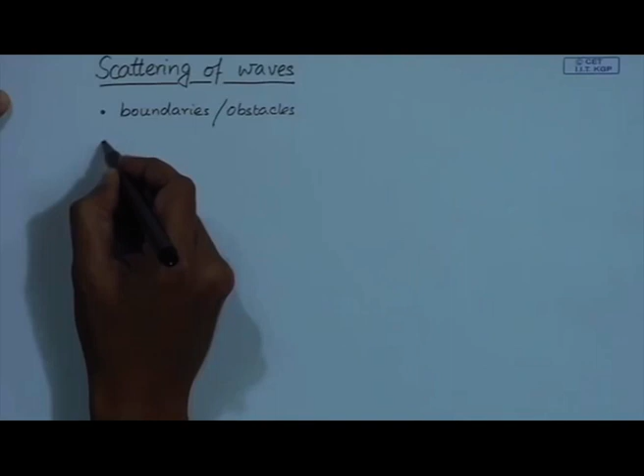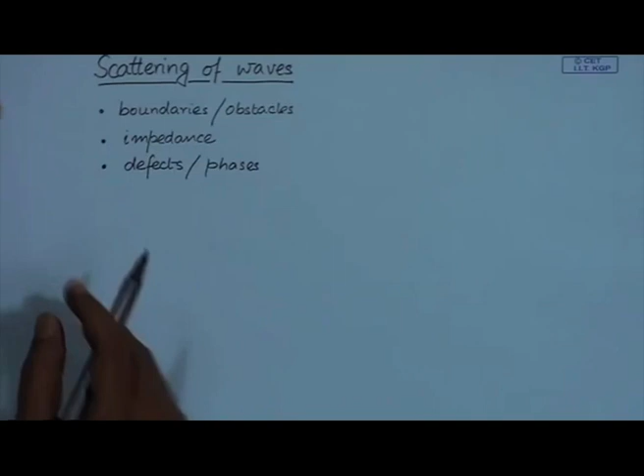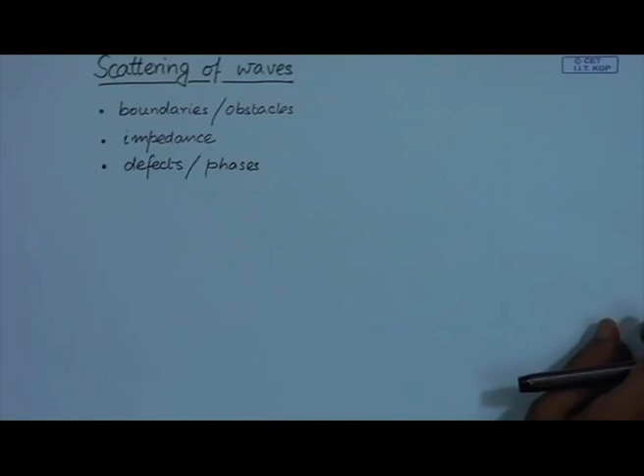So, today we are going to look at this phenomenon of scattering of waves, and this will help us understand what happens when a wave front goes and hits a boundary, an obstacle, or an impedance. Scattering can take place at boundaries or obstacles, at impedances such as finite boundary damping, or at defects. These defects or phases occur when there is a difference of phase inside a material. This scattering is of great practical importance for characterization and non-destructive evaluation of materials.

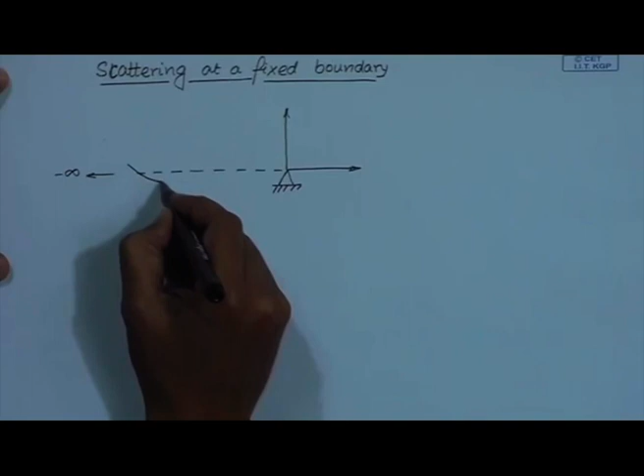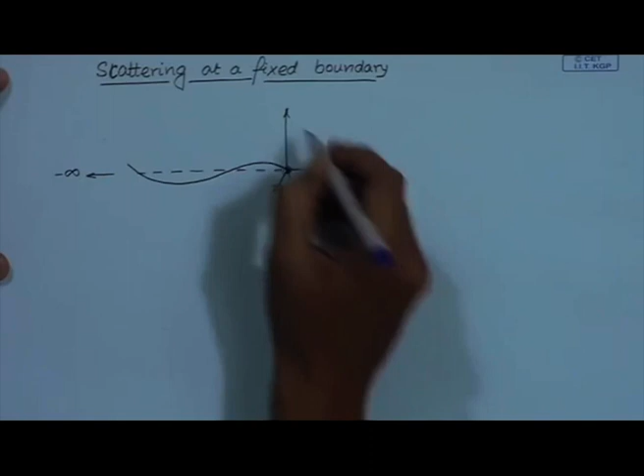So, let us start with scattering at a fixed boundary. We will study this problem with the help of the example of a string, a semi-infinite string. Here we have a string which is fixed at this boundary, and we consider that a harmonic wave is incident from minus infinity.

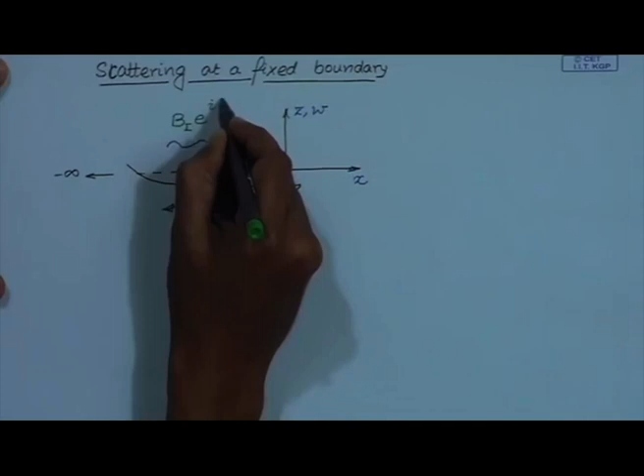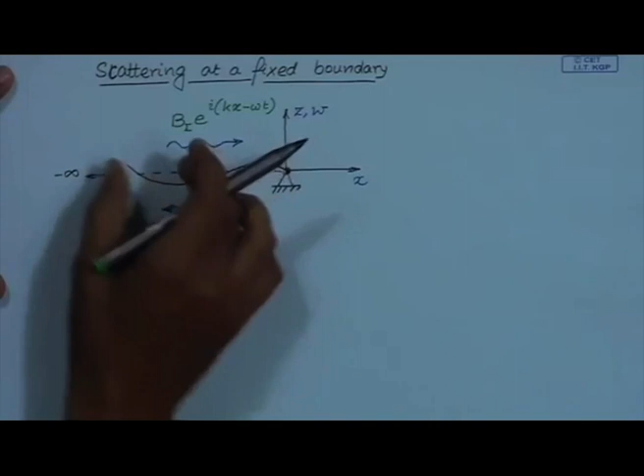A positive travelling harmonic wave is incident at this boundary, and when this wave comes and hits this boundary, there must be a reflection, because the material ends here. Now, we are going to consider an incident wave which is represented by this amplitude and space-time evolution, a positive travelling wave. Now, when this wave reflects, let us consider that the reflected wave is represented by...

Here I have used k and omega for the incident wave, the wave number and the circular frequency of the wave, whereas for the reflected wave I am using k prime and omega prime. Now, this medium is the same, so we must have, as we have seen in our previous lecture, that k must be equal to omega over c, and similarly k prime must be equal to omega prime over c. Since the medium is the same, the wave speed in this direction or that direction must be the same, so the wave speeds must be the same. So, k prime and omega prime are related by these relations.

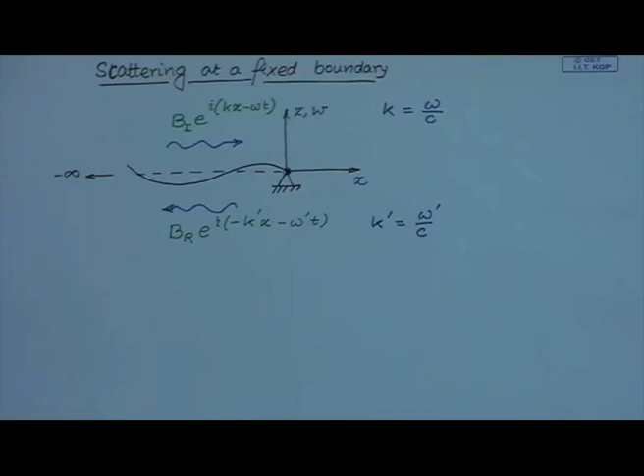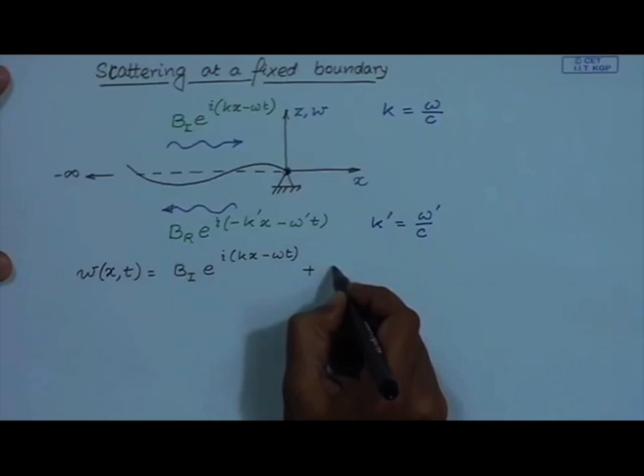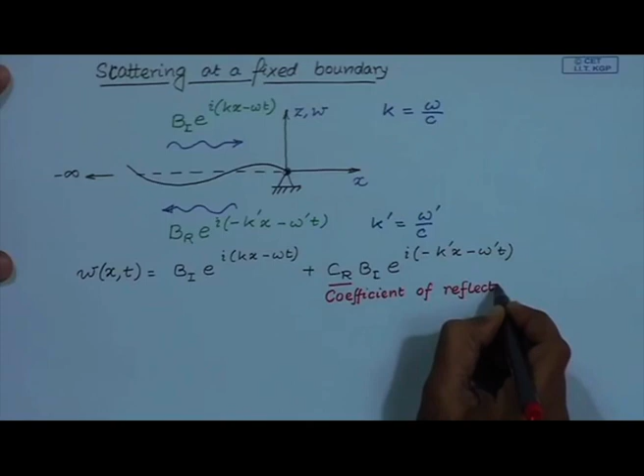So, the total wave field in this string is the incident wave plus the reflected wave. Now, what I am going to do is represent this amplitude of the reflected wave, which is B r, as a coefficient of reflection times B i, and there is this exponential part. So, here I am introducing the coefficient of reflection.

Now, the boundary condition at this fixed end is, of course, that this must be 0. So, when I substitute this total wave field in this boundary condition, this gives me...

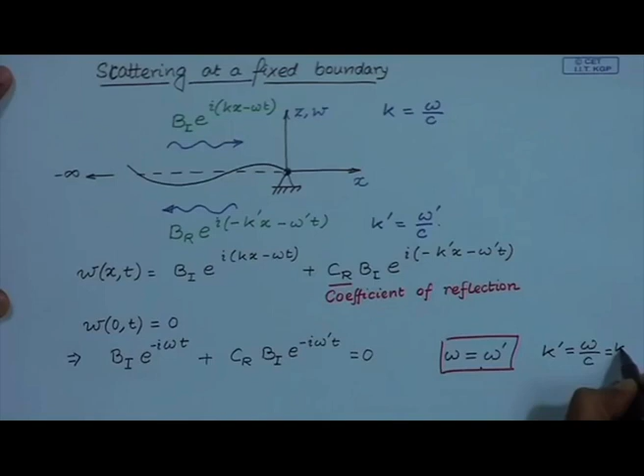Now, this relation has to be satisfied for all time t, and that is possible if and only if this condition is required, which means that the frequency of the incident wave must be equal to the frequency of the reflected wave. Now, immediately using this, we find that therefore k prime must be omega by c, and that is equal to k. So, which means that the wave number of the reflected wave must be the same as the wave number of the incident wave, since the frequencies of these two waves must be the same.

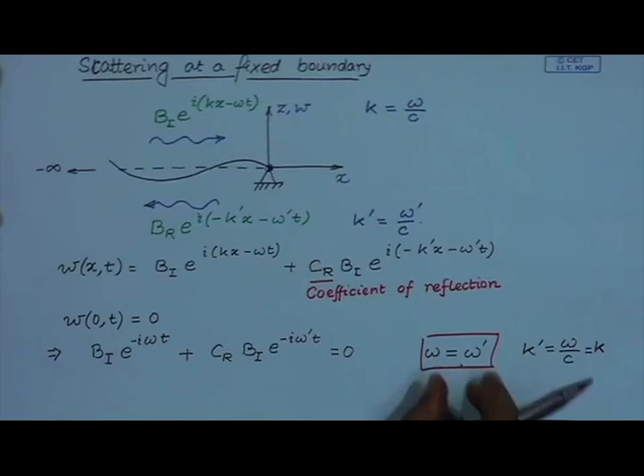So, once we put this condition here, what we have is that this implies C r is -1, because the other part is not equal to 0.

Now, this can also be written as... So, minus 1, the reflection coefficient minus 1 can also be represented as an exponential i pi, which tells us that there is a phase inversion. So, it is the phase change of pi. So, the reflected wave suffers a phase change of pi. So, the CR equal to minus 1 implies that the wave undergoes a phase change of pi.

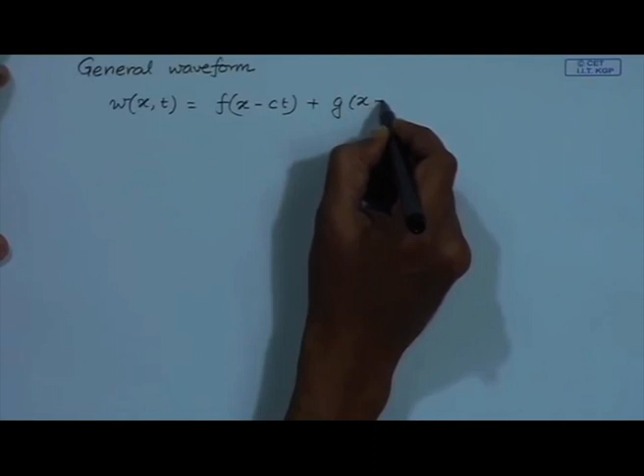Now, if you consider a general waveform for the same reflection process from a fixed boundary, then we have the field, the wave field represented like this, as we have done before. Now, the boundary condition again is, and that implies so this is plus, so this must be 0. So, what we therefore have is g of z, let me write C t as z, is equal to minus of f of minus of z. So, which means that our solution, the total wave field becomes

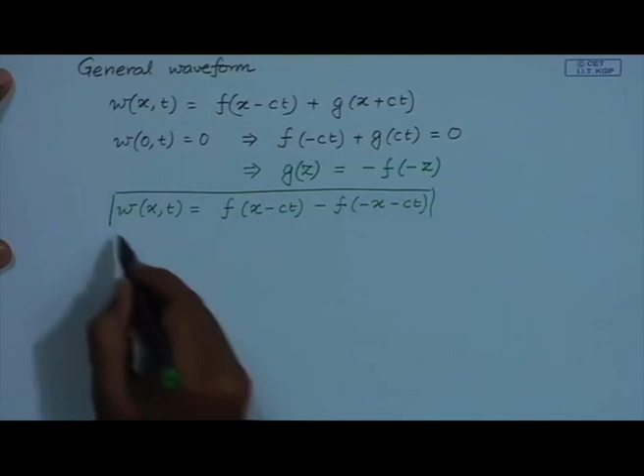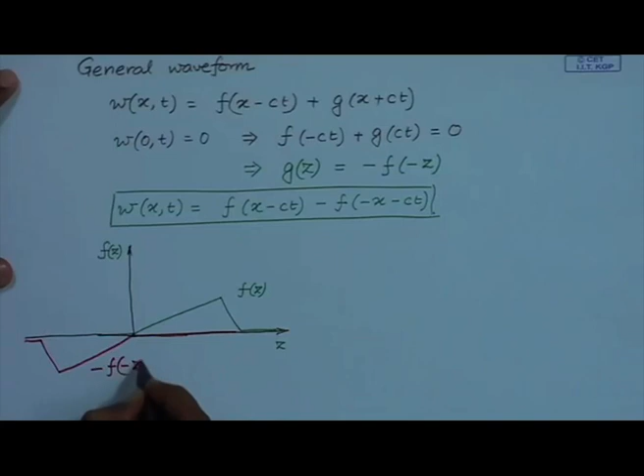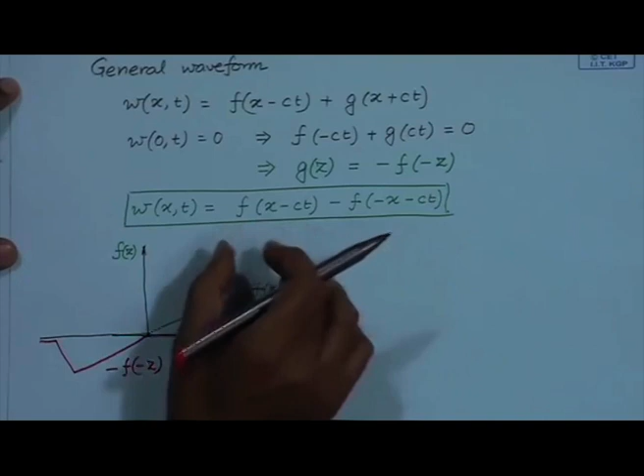Now let us see what is this minus of f of minus z. So, suppose this is f of z, then minus of f minus z would be... so if this is f of z, then this is minus of f of minus z. So, the total wave field is superposition of these two travelling waves, now one in the positive direction and the other in the negative direction.

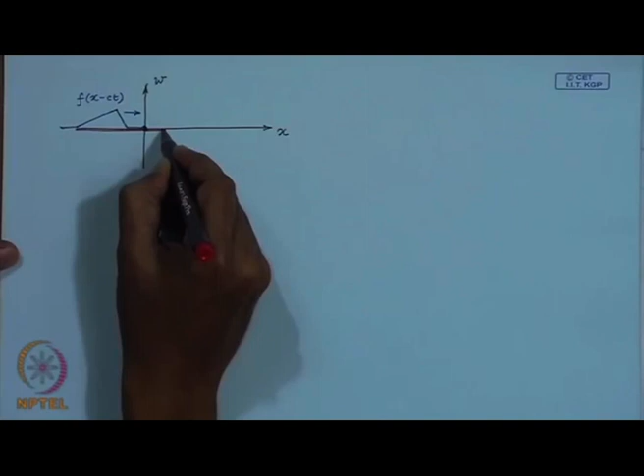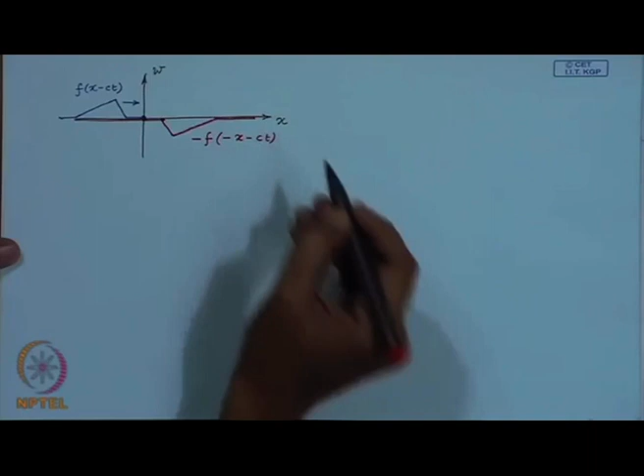So, let us see this. So, consider that there is this incident wave at this boundary, so this is f of x minus c t. So, this is moving towards the boundary, and imagine that there is a wave which is minus of f of minus x minus c t. So, this is travelling in this direction with the same wave speed c. So, superposition of these two is going to give us the net wave field in the string.

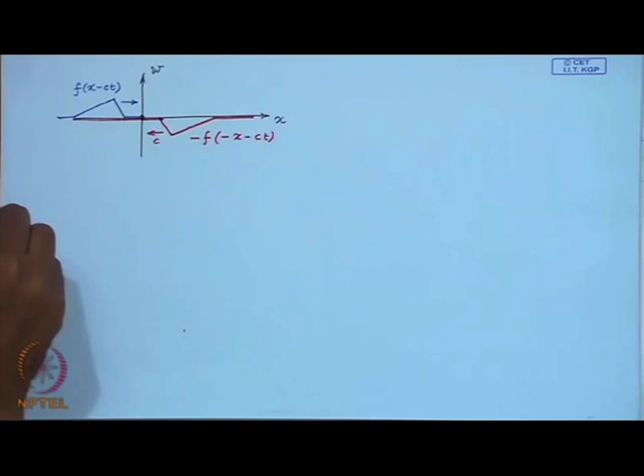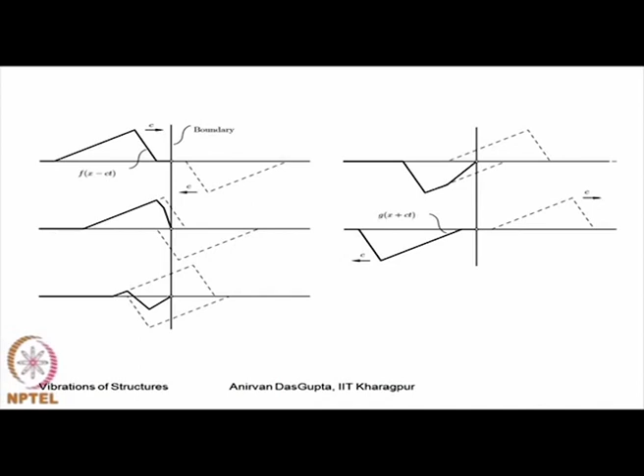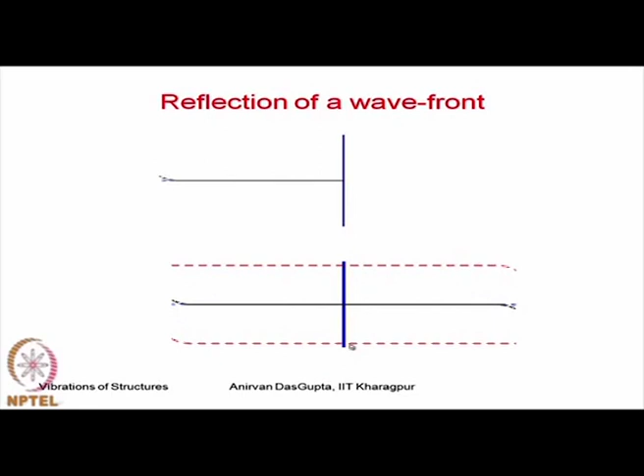So, in this next animation here, what we observe is there is a wave front which is appearing and the front is travelling towards the positive x direction and it hits the boundary and gets reflected. Now, this reflection process is shown in the figure below. So, here we find that there is a front propagating which is this red dashed curve and there is a negative propagating inverted wave which is because of the reflection as we have discussed just now. So, the superposition of these two waves is creating the reflected wave. So, the front comes, hits the boundary and is reflected back.

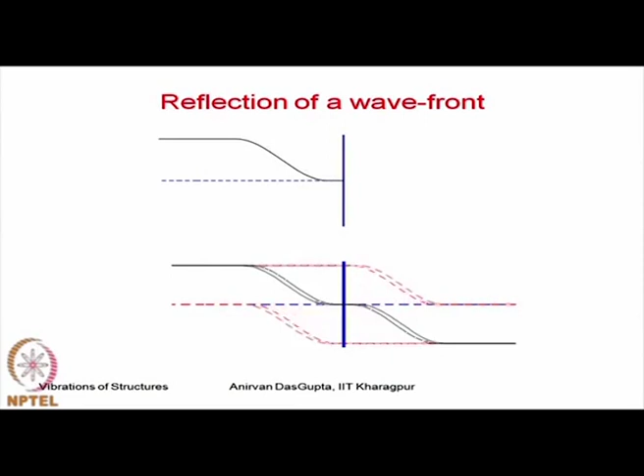So, what we observe is that as the wave comes it hits and then the reflected wave is a superposition of these two waves that we have just discussed. Now, one is the incident wave, the other one was the reflected wave. The reflected wave is inverted as well as there is a mirror image created. So, we have minus of f of minus x. So, f of minus x is the mirror and minus f gives us the inversion. So, there is an inversion as well as a reflection. So, that is what we have observed.

Now, let us look at this case of a fixed string. Now, when you have a pulse which is travelling to the left, let us say, then it hits this fixed boundary and you have a wave, that is the reflected wave is like this. This reflected wave goes, this positive travelling wave now goes and hits the right boundary, and there is a negative travelling reflected wave. So, that then completes the full cycle. So, the time taken here, I have written out the time taken by this wave to travel this whole path.

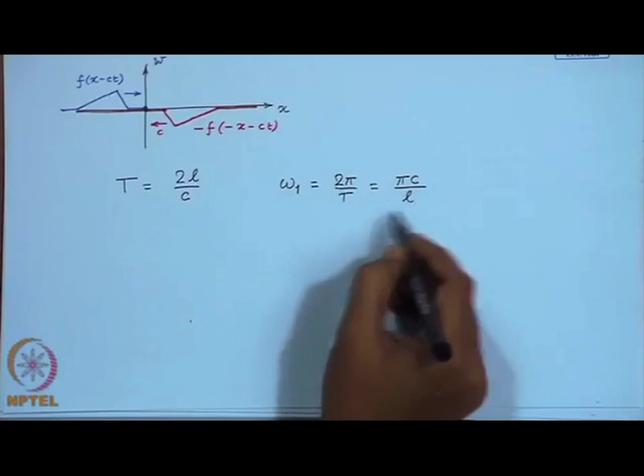So, we find that the time period is 2L over C. It takes this much time for the pulse to once again repeat itself. From here we can estimate the fundamental frequency, the circular frequency, which is 2 pi over T, which is pi C over L.

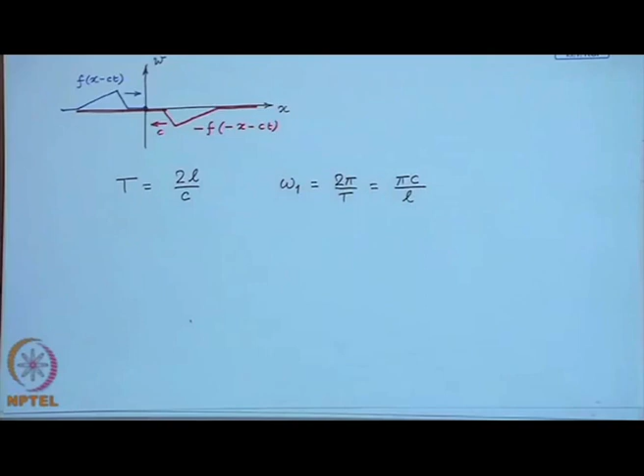And this is the fundamental circular frequency of a fixed-fixed string. So, the frequency of a finite system can be estimated or calculated based on this wave reflection process that we have just studied. So for the fixed-fixed string we have been able to calculate the fundamental frequency.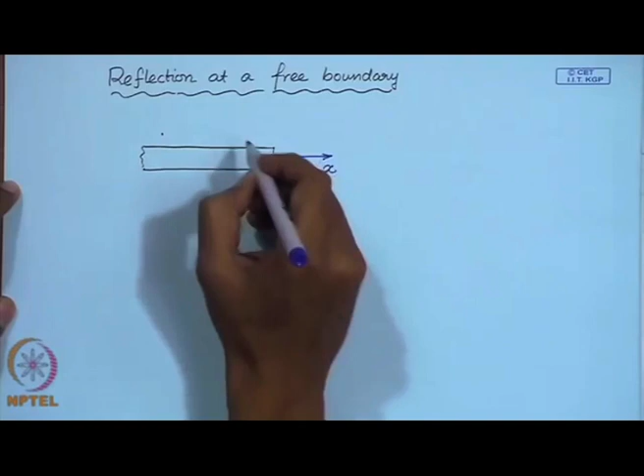Now let us look at this example of reflection at a free boundary. So for this we will consider the uniform bar. At any point x of the bar we have this axial displacement. So this is the field variable u of x and t.

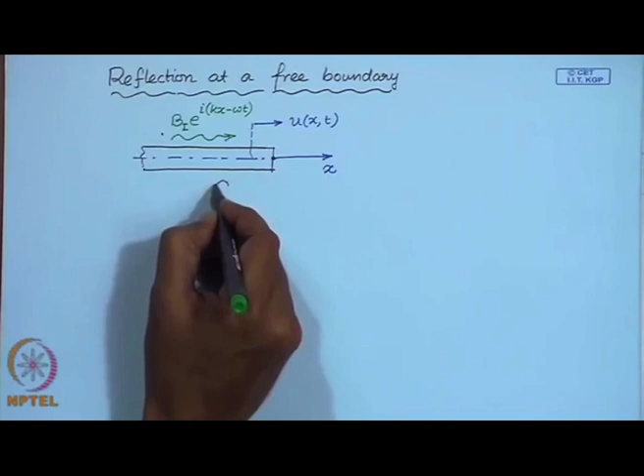So again we have this incident wave, and since this is a free end now, there is an incident wave given by this, and since the material ends here, there must be a reflection. So this we are going to once again represent as reflection coefficient times B I times a negative travelling harmonic wave.

And what we learned from the previous example, these k and omega must be the same as we have seen in the previous example. So the total wave field in the bar is given by this expression.

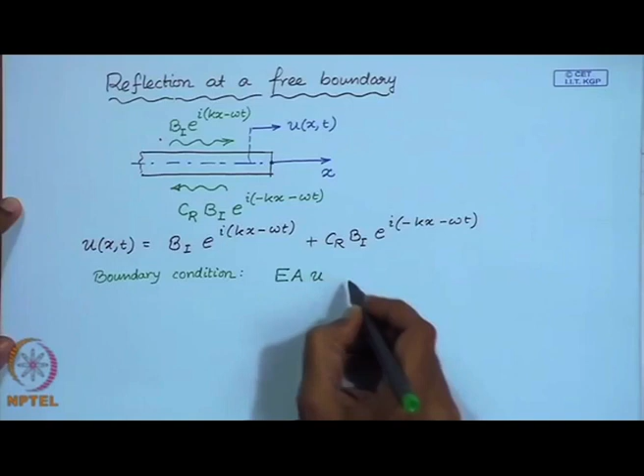Now the boundary condition. So this is a free boundary. For a free boundary we know that it is a force-free, or natural, boundary condition. So once you substitute this wave field in the boundary condition.

And since this time function will not be zero, this has to be satisfied for all time. So this would imply, upon simplification, that CR, the reflection coefficient this time, is 1. And 1 is nothing but exponential, you can write it like this.

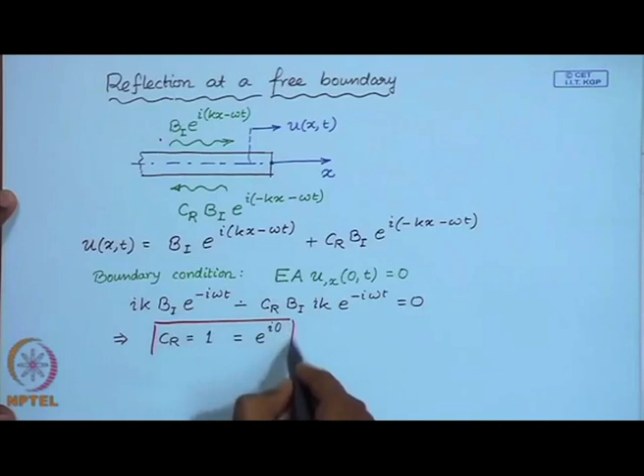So this tells us the reflected wave suffers no phase change. So it is reflected as it is.

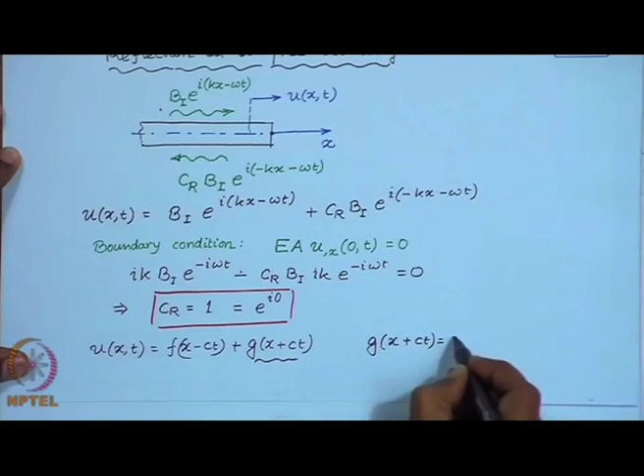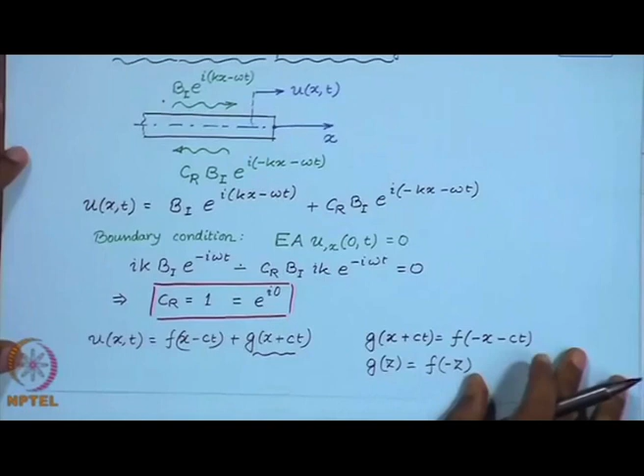Now you can perform the same analysis as in the previous example for a general waveform. If you consider and use this boundary condition, then you will find that the reflected wave can be represented such that g of z is actually f of minus z. Now recall that for a fixed boundary, g of z was minus f of minus z, and as we have seen, f of minus z is just the mirror reflection of f of z.

So there is no inversion of the wave, as we have seen, there is no phase change. Now here in this animation,

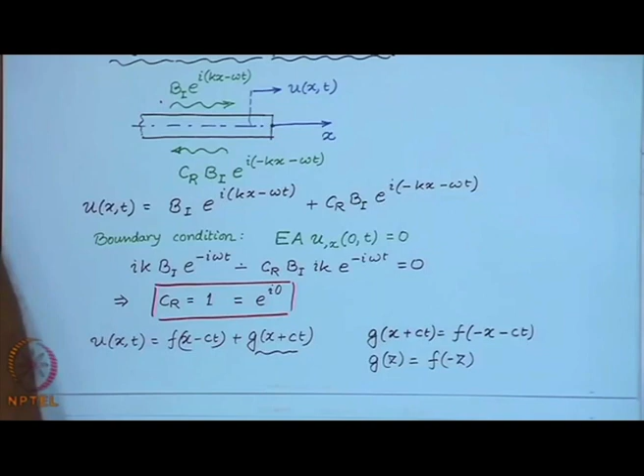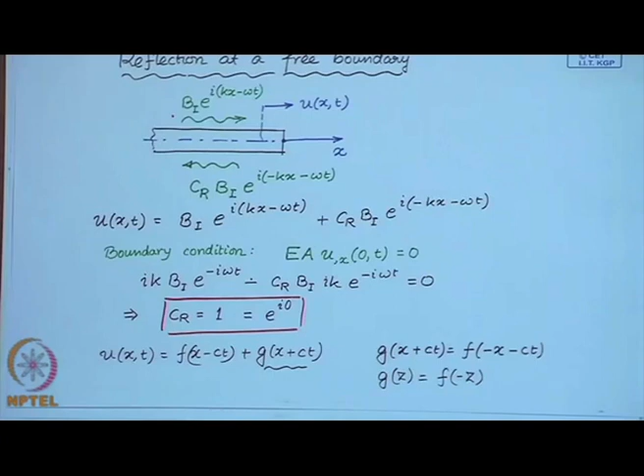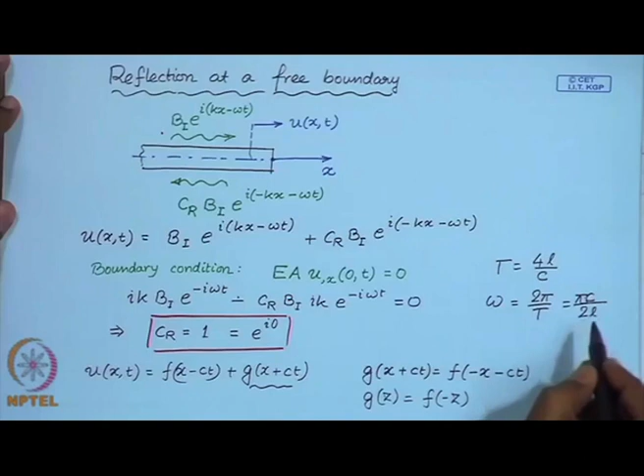Now if you calculate the total time it takes, given here, in this case you have a time period of 4L over C. Which means that the circular frequency is 2 pi over the time period, which gives us pi C over 2L.

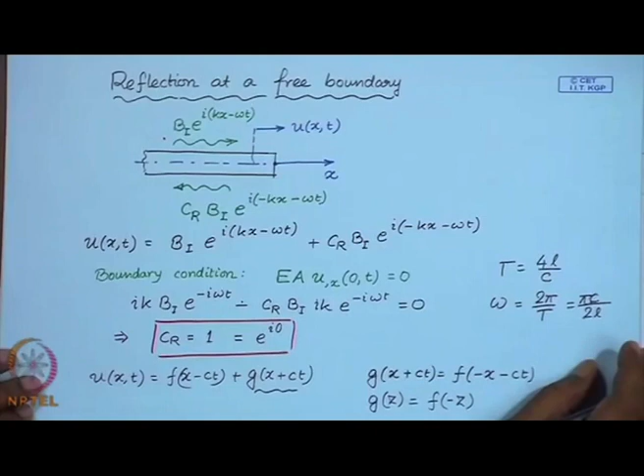So, we have looked at these two examples of scattering at a fixed boundary and scattering at a free boundary. Now we are going to generalize this, and look at scattering at a boundary with finite impedance.

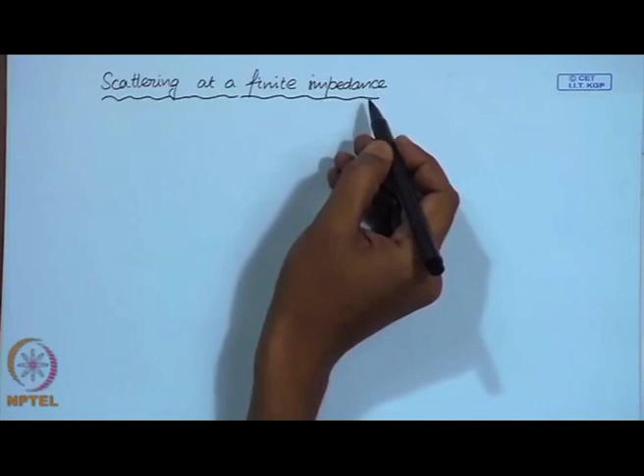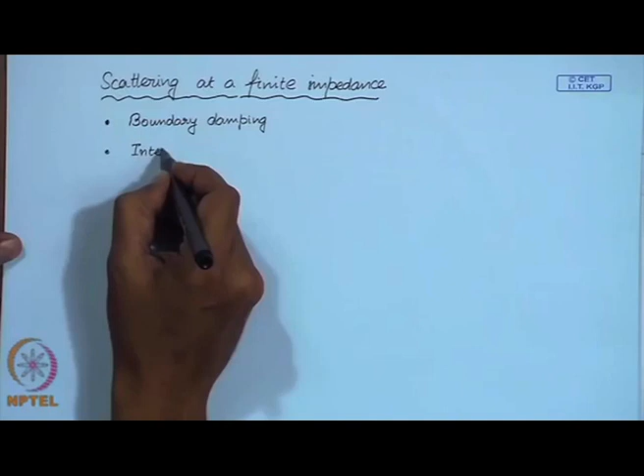This case arises when you have, let us say, boundary damping, or you have internal phases in a material, or even defects. Then you can have scattering at a finite impedance.

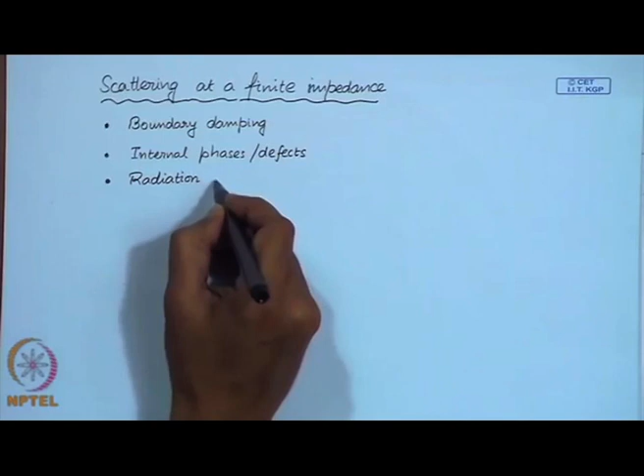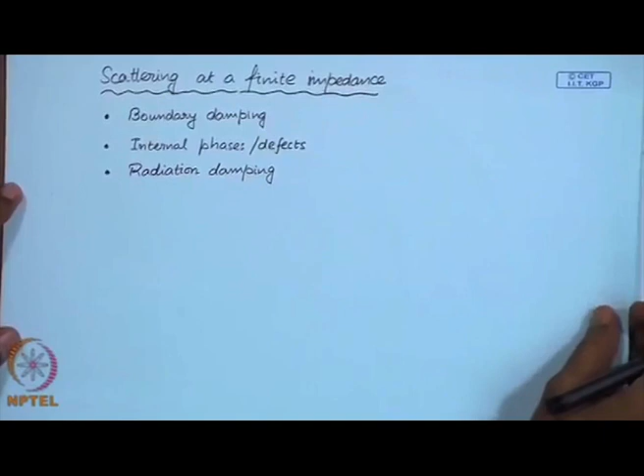The third case occurs when you have radiation damping. So these are the situations where you can have scattering at a finite impedance. We are going to look at these situations with the example of a uniform bar which is made up of two materials.

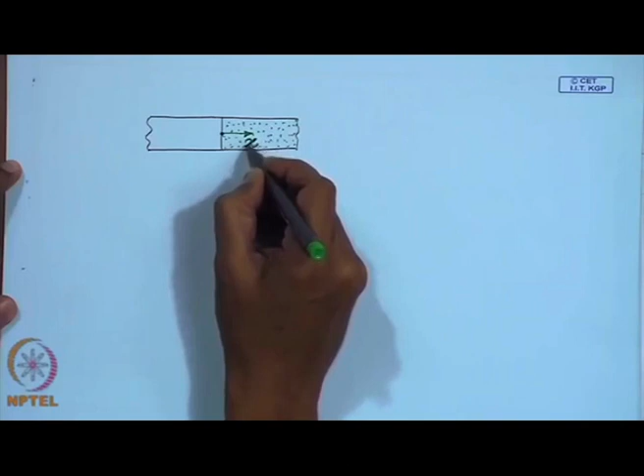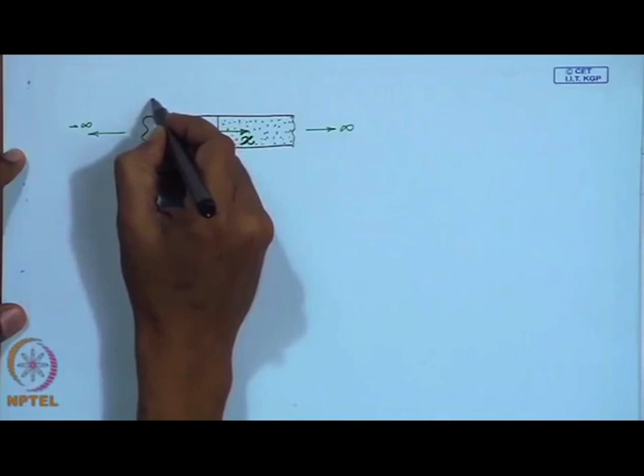So we have this junction. This material 1 has material and geometric properties like this, and material 2 is like this.

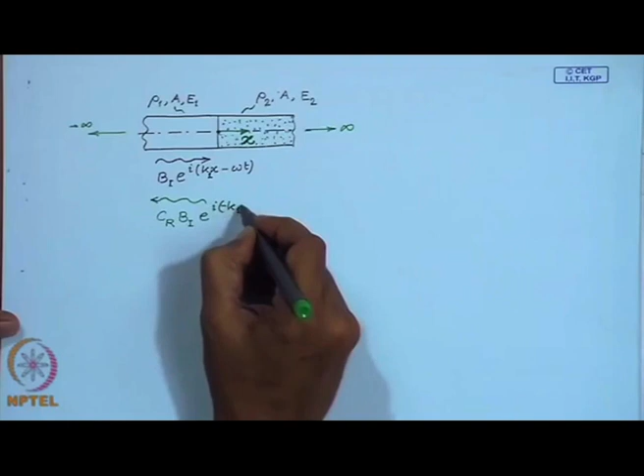Now we consider that there is an incident wave from the left, a right propagating harmonic wave. Here I am introducing a wave number k1 in material 1, and then there is a reflected wave which will have the same wave number k1, only it is a negative travelling wave.

There is a transmitted wave that propagates in material 2, with wave number k2. Observe that I have taken the same frequency, as we know from our previous calculations that these frequencies must be the same. This comes from material continuity, so the frequency must be the same, but the wave numbers may be different.

In these two different materials, the wave number, the frequency and the wave speed are related like this. So C1 is the speed of axial waves in material 1, given by this expression, and similarly for material 2 we have this relation.

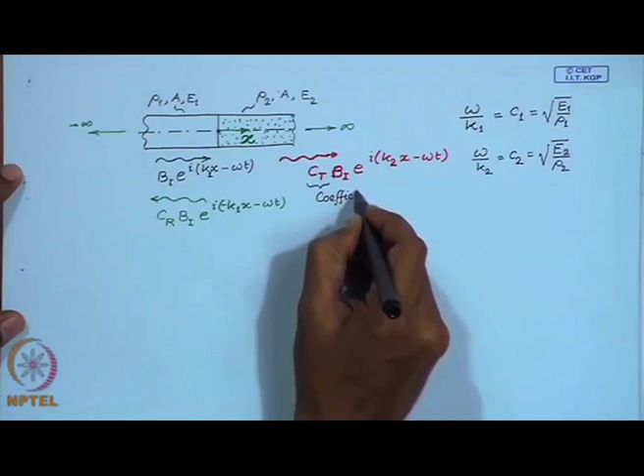Here we have this as the coefficient of transmission, Ct, and Cr as the coefficient of reflection. So the total wave field in material 1 is given by this expression.

Similarly, the total wave field in material 2 is nothing but this transmitted wave.

Now at this junction we must have some junction conditions. The first condition comes from the continuity of the material, the junction should not break, so material continuity has to be maintained. There are two junction conditions: the first is material continuity, or continuity of displacement.

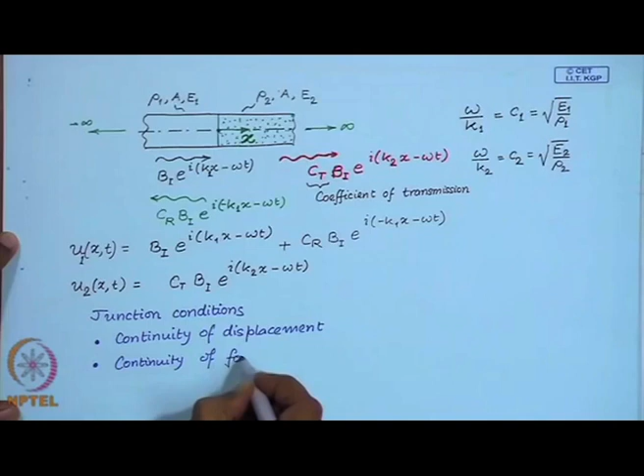So let us write down these junction conditions. The displacement junction condition tells us that the displacement of material 1 must be equal to the displacement of material 2, and the force continuity can be written as the force on material 1 must be equal to the force on material 2.

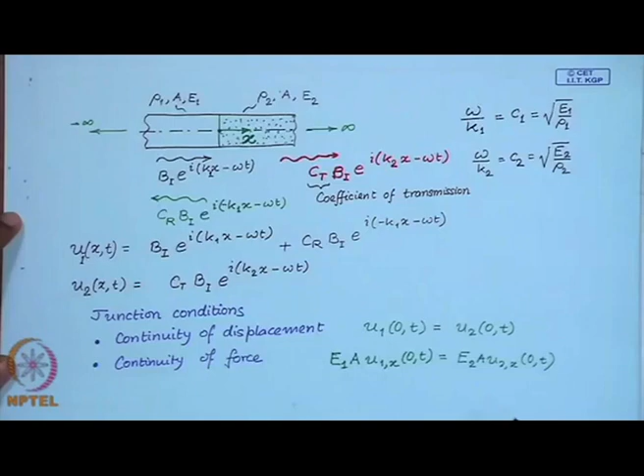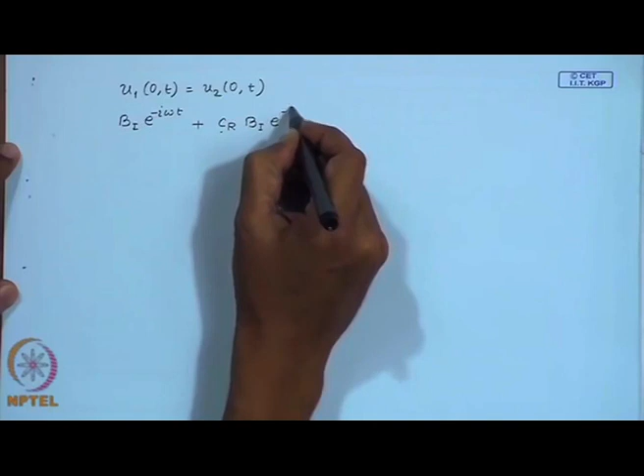Now when we substitute our wave field into these two junction conditions, let us first look at the displacement condition. If you substitute u1 and u2, and since all these frequencies have to be the same as we have already assumed, this implies the condition that we get from continuity of displacement.

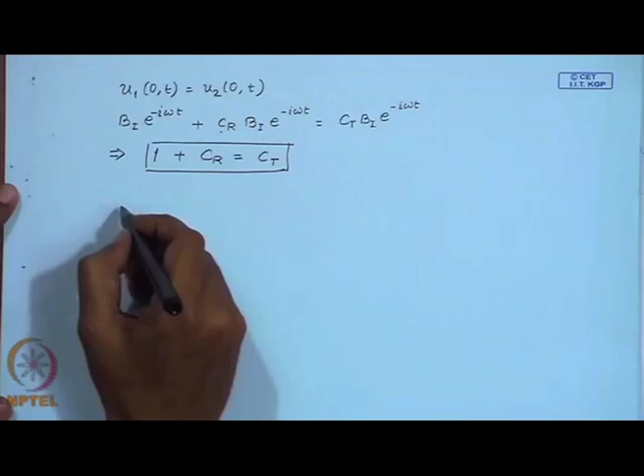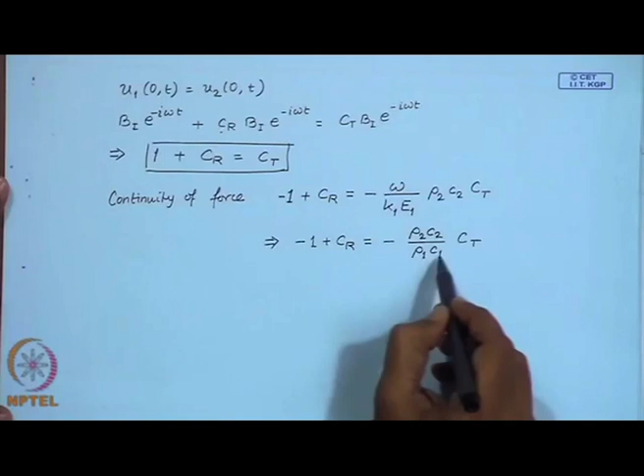Similarly, from continuity of force, if you do the same calculation, you can easily obtain a similar relation, which can be written like this, where we have used omega over k1 as C1, and E as rho1 c squared. So 1 over c squared comes extra in the denominator, and this becomes rho1 c1. This is the condition we obtain from continuity of force.

Now, using these two conditions, you can very easily calculate the reflection coefficient, and similarly you can calculate the transmission coefficient.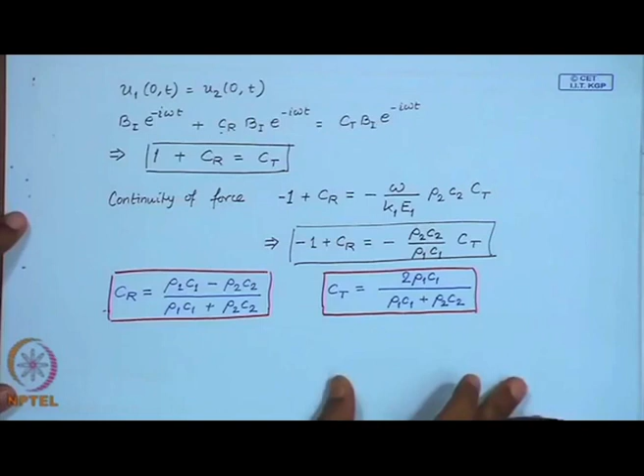So, we have calculated the reflection and transmission coefficients. Now, let us make some observations based on this. You will find that this transmission coefficient is non-zero, which means some part of incident energy is always going to go into material 2.

Now, this reflection coefficient can be 0 only when rho 1 c 1 equals rho 2 c 2. This can happen in various ways. One is there is a single material, the material is the same. So there is no reflection, that is very obvious.

Now, this rho 1 c 1 can be written as... So, if we have two materials for which rho 1 E 1 is equal to rho 2 E 2, then the reflection is 0. But this is a hypothetical situation, a theoretical possibility that this product is the same for two materials, but it may not occur in nature. So, when we have this junction of two materials, there is some transmission and some reflection.

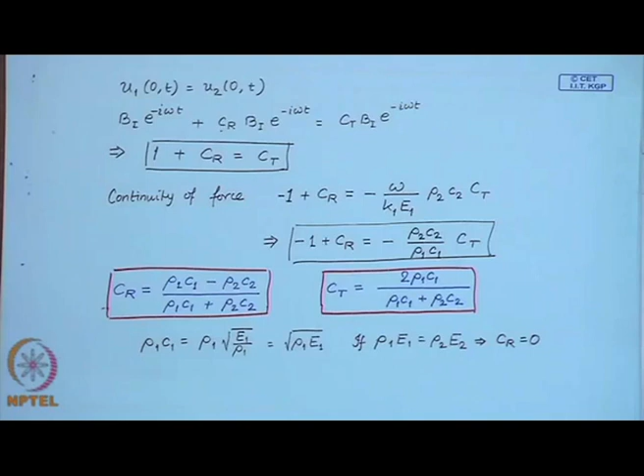Now, this case is an important example for certain applications. For example, when we do ultrasonic testing of materials, we have the ultrasonic transducer which we put on the sample, and we expect that these ultrasonic waves will propagate into our sample completely. There should not be any reflection from this transducer sample interface.

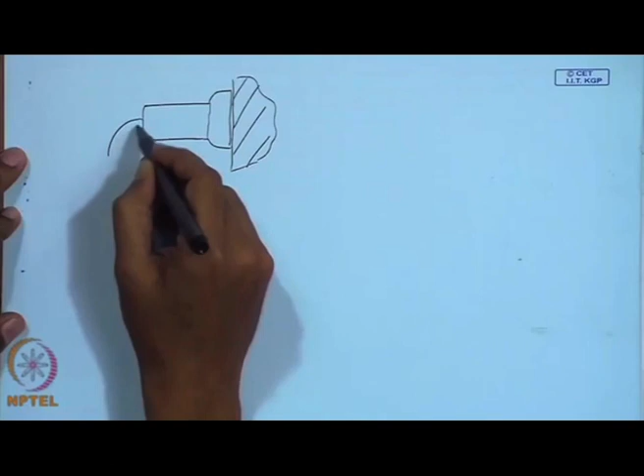So, let us look at this. We have this transducer sample interface, and we want that all the waves that we generate here should enter into the sample. There should not be any reflection right from this interface.

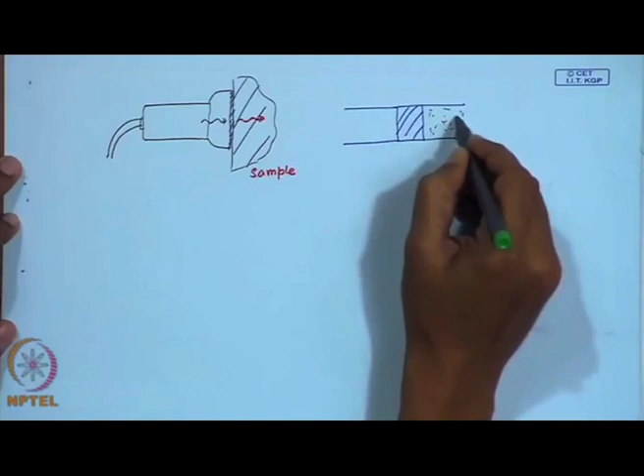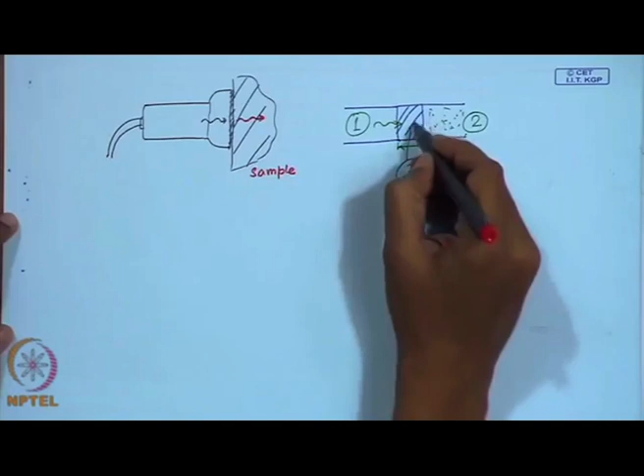So, what we usually do in this case is we put a thin film of a third material. The scheme is like this: here we have a third material at this interface. So this is material 1, this is material 2, and in between we have a third material. We can adjust the thickness of this material so that there is only transmission and no reflection, a complete transmission. This is very useful for such applications.

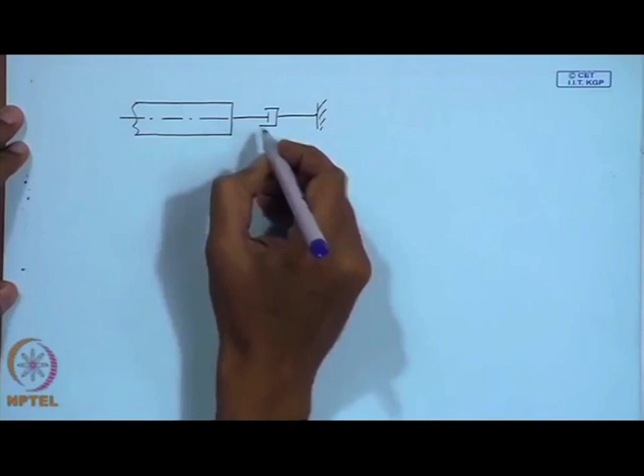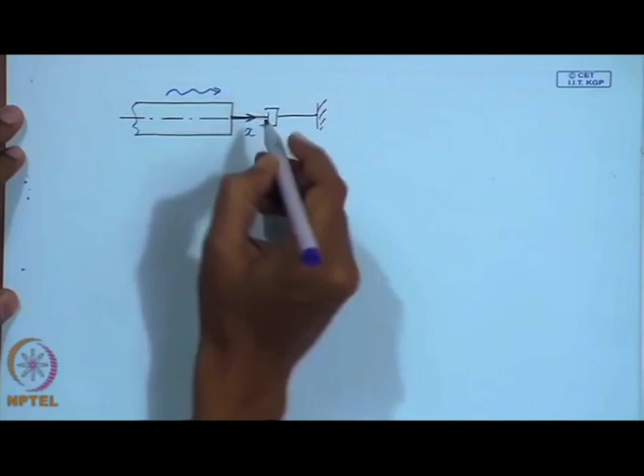Now, let us consider a second example of scattering at an impedance. We have seen this example before: a semi infinite bar with boundary damping. Once again we have an incident wave, a reflected wave, and we consider that this damper has a damping coefficient d. So the total wave field is given like this.

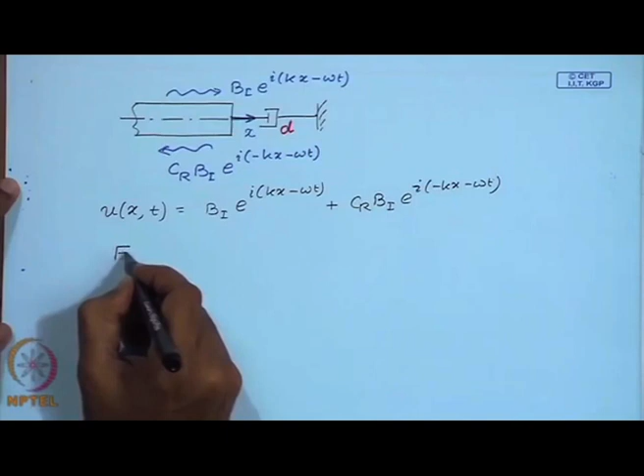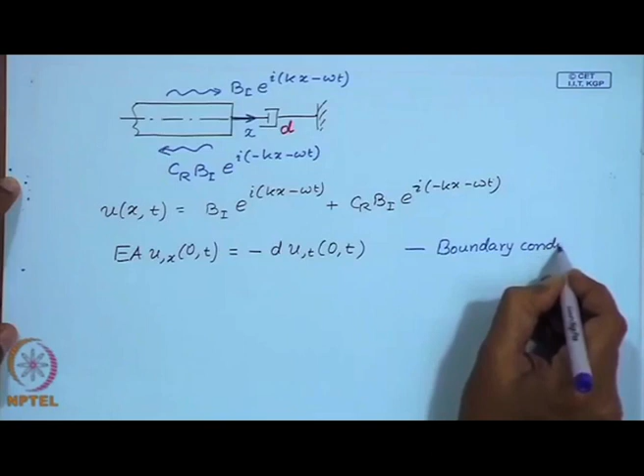Now the boundary condition is this, at x equal to 0. Now when we put this expression, the wave field in the bar, into this boundary condition, we can easily arrive at this expression. From here we can calculate the reflection coefficient like this.

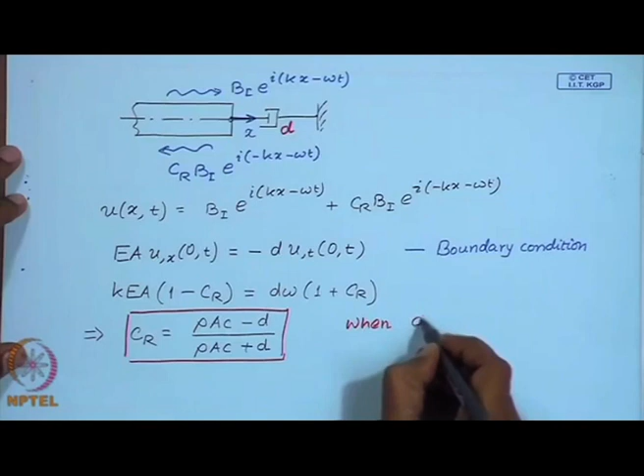Now we observe some interesting things. When d, the damping coefficient of this dashpot, equals rho a c, the reflection coefficient goes to 0, which means there is no reflection in the bar. The wave comes and gets completely absorbed in the damper. Now what is this special value of d? As you recall, the impedance of a semi infinite bar is also rho a c. So what this wave feels is that there is a semi infinite bar attached at this point, as if this bar has been extended up to infinity. So the whole wave goes into that, and it gets completely absorbed at this boundary for this very special value of the damping coefficient.

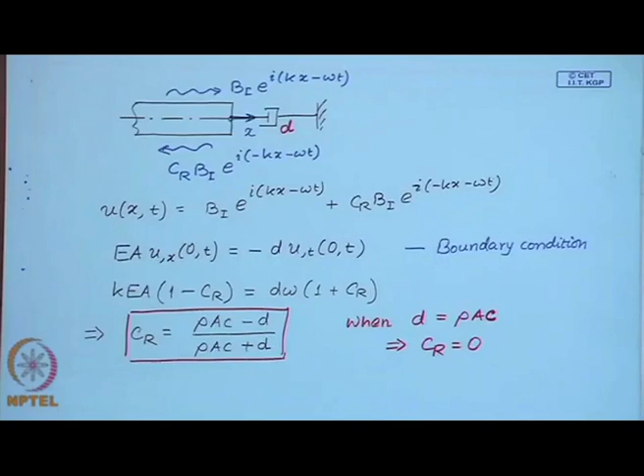This is the reason why when we did this modal analysis, or solved the eigenvalue problem for a bar with boundary damping, we found that for very special values of this dashpot there are no eigen frequencies or eigen values. So now we understand that the concept of eigen frequencies, eigen values, or modes occurs only when we have finite systems. But this special value of damping has almost made the bar infinite in the positive x direction, so the concept of eigen frequencies does not exist, and the kind of solution we assume for modal analysis does not hold. So for this special value of the damper, we have a perfectly absorbing boundary, which is sometimes very important in applications.

For example, if you want to absorb sound in a room, then you must design your wall dampers or the absorbing material on the walls so that it becomes a perfect absorber.

So, what we have looked at in this lecture: we discussed about scattering of waves at a fixed boundary, at a free boundary, and at interfaces with finite impedance, and we have looked at some interesting results and made some interesting observations based on what we discussed today. So, with that we conclude this lecture.